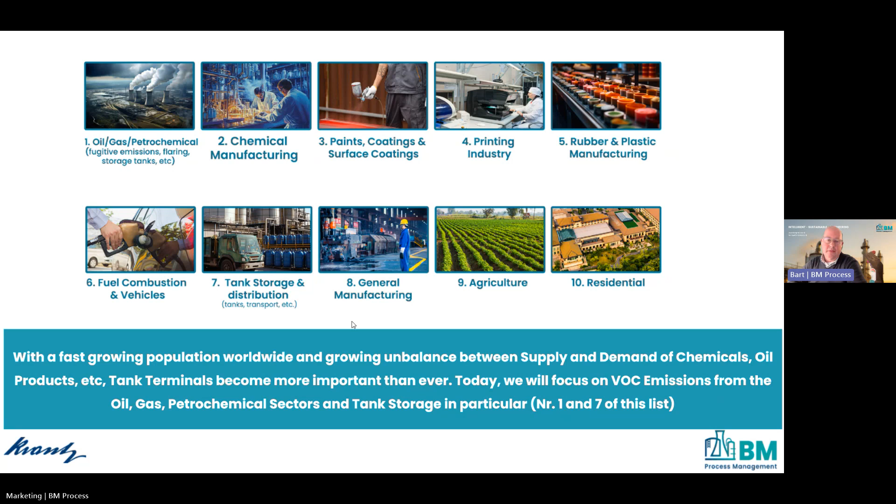Emission and the effects of laws that we use - I want to show this because you hear a lot in the world like, 'yeah, but it's only a small change, it won't help anything if we start to do this and that.' I happen to pretty much disagree on that, because we've got quite a few examples where it has been shown that it can actually work as long as we work together, which at present globally is a small challenge, but let's just try and see the good things here.

For example, number 2, the ones that still recall - the ozone layer used to be a problem, but we actually solved that. So that's one thing we did solve quite well. For example, HFCs in spray cans - you all know that had a real problem. Since we acted globally, that actual problem is gone. So that shows that it can work.

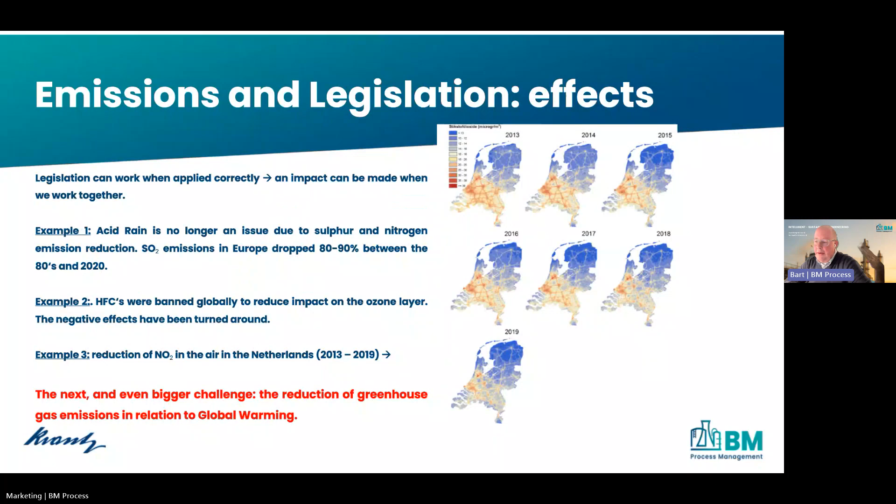Example 3 is the map that you see on the right. There you see NO2 in Holland over not a very long time frame, and you see how it has actually gone down. So we can act even in such a small spot as we are here in Holland - we're not that big, but still we can see it can work. The next, and I think the main challenge we will have, is the greenhouse gas and global heating up, and that's what we want to talk about a little bit more today.

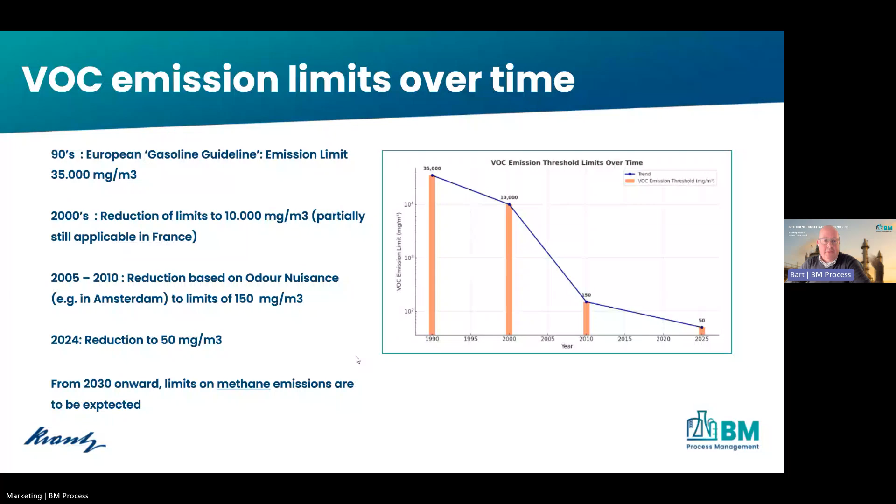Emission sources in tank storage, because that's what we are here to talk about. This does apply to quite a few other things as well, but for now we look exactly at this part. So there are actually 3 main sources.

One of them is, of course, the tanks, because you store the product, you have breathing and so on, so you lose product there. When you load and transport the product in ships, barges, trucks, rail cars, you have air that you have to treat, or there's air where there's actually product in it, which will have to be treated.

And then we have the final one, which is fugitive emissions. We will generally talk about the first 2, because fugitive, that is another ball game. However, on that, we have a little quiz in the next slide, so we can talk about how do you think you need to treat fugitive emissions.

So there are a few answers possible here. I would like to hear from you what you think is the way to treat fugitive emissions. Wait a second, see what you think.

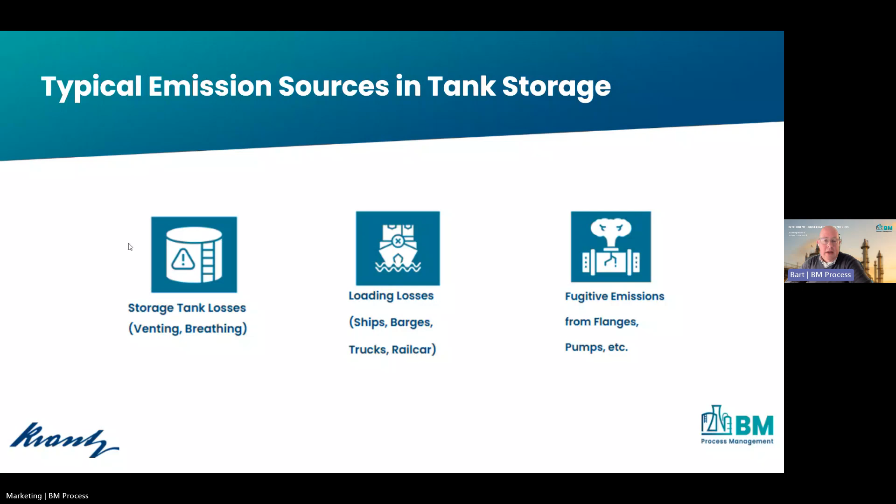We can go to the next slide, please. I should do that as well, because I have it in front of me.

So how to reduce emissions in tank storage? There's quite a few options we have. For example, floating roofs on tanks, or breather valves on tanks and so on, to ensure that we have less breathing losses. Then all the exhaust air streams, we can use treatment for them. That is option number 2. And option 3 is, as we just said, to ensure that you have a clear view on fugitive losses.

Let's say you have to make sure that you know where they are. That is the first challenge. And then to ensure that you can bring those down. There are quite a few options for that, as we previously discussed. So these 3 options are actually all in use as we speak, at a whole lot of the clients that we work for.

So what I want to note is that this has gone down dramatically over the past 25 years. So this works, it works like a charm. That is like we saw previously with the actual thresholds. We did a big leap and we really did a lot.

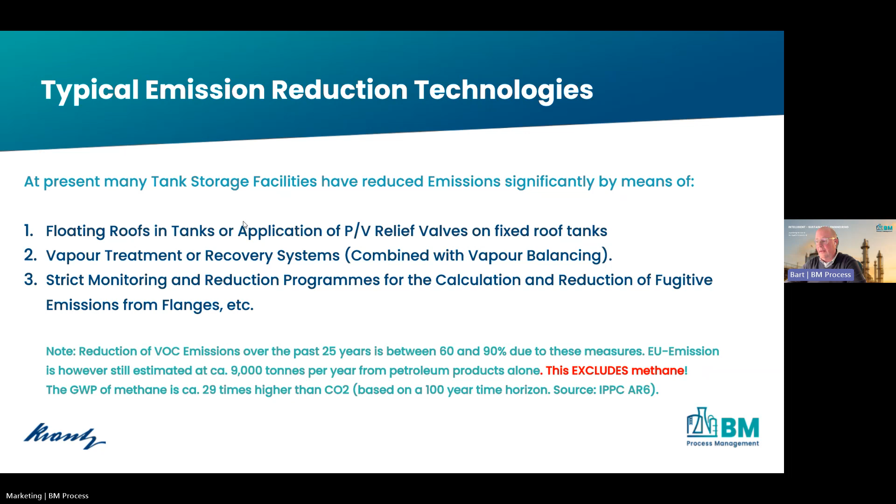However, only from the oil products alone, estimated, we still have a massive mass flow that we lose into the air, and therefore it has a massive effect on air quality and on global heating and this and that. And what I want to say once again, this excludes methane, and methane is quite a problem. But we will go into that in the next steps. So this is what I like to show here.

Then we can go into the next slide, please. The general processes that we use at tank terminals - there are many, I only want to talk about 2 because those are the 2 that we see most. First of all, we can burn the off gas. That can be in a flare, or you have quite a few processes there. Or you can actually treat the process in an actual VRU, which is also extremely widely spread.

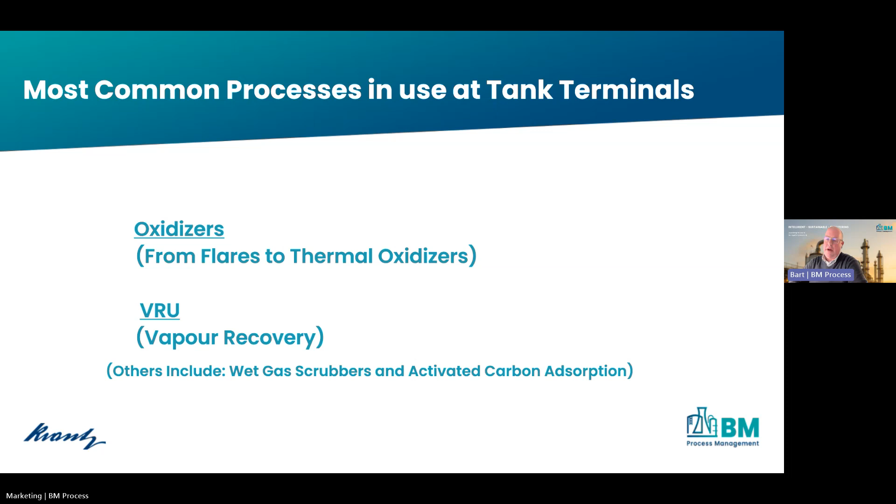Of course, you also have scrubbers and all kinds of other stuff. But those are not as widespread and generally a lot smaller. It's for very small streams and stuff like that. So these are the 2 main points, and I want to have those in mind as we go into the next slide.

I'll first talk about the first one, the oxidizer. So that means we just burn the off gas. We get the off gas from all of the actual processes we have on the site. We add a lot of extra gas, heat it up, burn it, and then you're done. You treat everything, it's clean.

However, you use a lot of gas, because there's a high airflow or a high gas flow that you have to heat up, and you have to crack all of the stuff that is in this gas stream. So you use a lot of gas, meaning since you have flames, you will also have NOx, and NOx is a problem, as we all know. And if you don't know, feel free to ask questions about that.

But the main problem here is we burn the off gas, we use a lot of gas, and we have extremely hot off gas. We blow it straight into the air. So we don't use any of this heat.

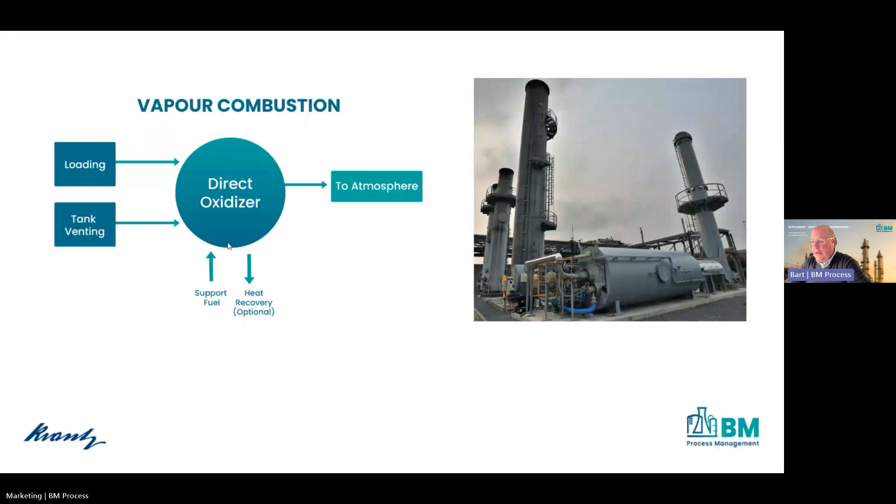The next process is the VRU, which we all know very well, generally known. And the pro of this is, of course, that we can make use of this product. We get the actual product out of the off-gas stream again that we can then reuse. Seems like a good idea. It is. Drawback is you can't use it for every product, but there are quite a few products where you can.

There's also another problem. These plants have a hard time meeting the latest thresholds that we have. I actually wanted to ask the question, do you think these plants can meet the latest threshold? But I just answered the question for you, so that's my bad. But anyway, we see a lot of problems with these plants.

So we can talk about that. It might be a question I ask in the chat now: what are the general problems you think clients have with plants like this? Where are they generally at fault, or where is their weak spot? I don't know whether there's anyone who cares to type.

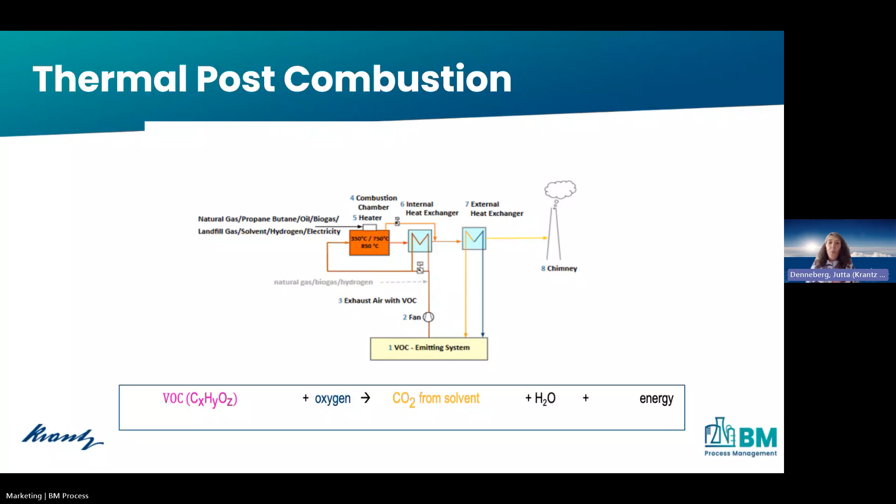So thermal post-combustion units therefore have an internal heat exchanger. They have heat recovery, which can be supplemented by external heat recovery. This distinguishes them from flares and simple oxidizers, so they are still allowed to be used. Regenerative thermal oxidizers are very energy efficient units. They have an internal regenerative heat storage system with a very high heat exchanger efficiency. These units are, so to speak, the best in their class.

So Amol, would you please let our audience guess how high the efficiency of the regenerative heat exchangers can be? Yeah, sure. I'm just launching another poll. So look at your chat or your screen, you will see it. The question is, up to what percentage of internal heat recovery can an RTO, regenerative thermal oxidizer, achieve? 55, 66, 97, or up to 100%.

Okay, I got 5 responses. 7, 8, 10. Let's have a few more. Our highest was 16, so let's have at least 16. 11. All right, let's wait for another 10 seconds and then I can submit and we can view the result. 12. Okay, I think we can view the result.

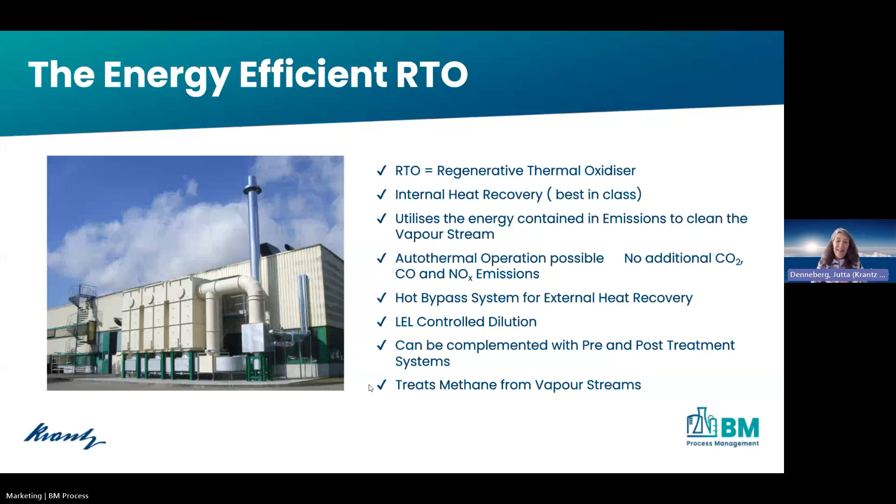The RTO itself has a complex control and regulation system. It can be completed, for example, with an LEL measurement for the controlled dilution of the exhaust air. Any dilution that may be necessary because the maximum authorized VOC concentration is 25% of the LEL can be part of a pre-treatment system. Depending on the composition of the exhaust air, pretreatment and post-treatment systems can be added to an RTO, for example, for inorganic compounds or droplets in the exhaust air. All types of VOCs can be oxidized in an RTO, including methane. Very important. So let's go to the next slide, please.

What emissions does the RTO generate? Well, that depends. If a fossil fuel, such as natural gas, is used for the burner to generate the necessary oxidation temperature, carbon monoxide and nitrogen oxides are produced in addition to CO₂ and water vapor. We saw the formula before. However, if the VOC concentration in the exhaust air is high enough and the heat from the VOC oxidation is sufficient, the burner can be switched off. This is also known as an autothermal concentration. In this case, no carbon monoxide and, more important in the Netherlands, no NOx is produced, as long as the exhaust air doesn't contain any nitrogen-containing VOCs.

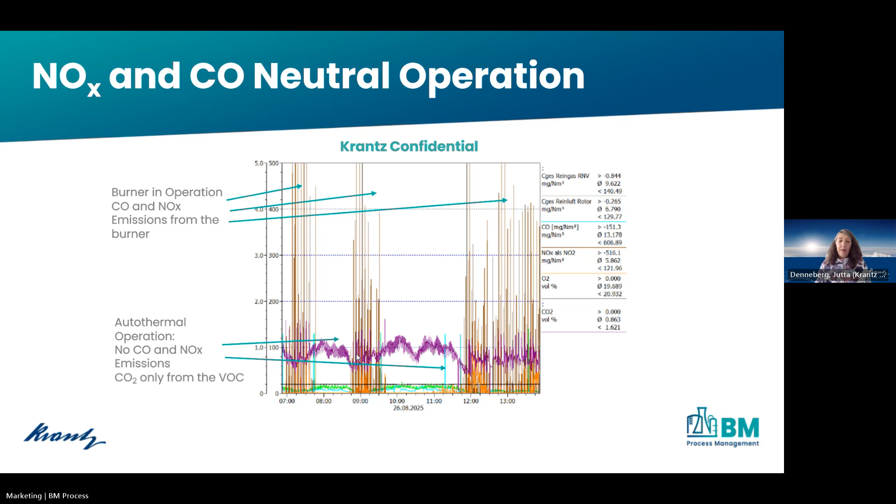This must be added. So I think this diagram you see now illustrates this very impressively. It shows two different patterns. One with additional emissions from the burner, this is with the brown peaks, and the other one without. So if we have an autothermal concentration, we still have CO₂ emissions. You see this is a purple curve, but you don't have additional brown peaks. This is a CO concentration, and you don't have any NOx. This is the orange one. So let's go further to the next slide, please.

RTOs can be used in all areas of VOC emissions. But what role do RTOs play in the limitation of the emissions coming from tank terminals, and what challenges do they face in this area? Well, all VOCs can be oxidized, but they behave very differently when this happens. So tank terminals often have to deal with a really wide range of products. And depending on the transfer and transport processes, the volume flow rates and the VOC concentrations vary greatly and change rapidly. There's a wide range of very different means of transport. Sometimes a ship is loaded and sometimes there's no ship in the harbor. And also the oxygen content and the humidity of this exhaust air can change a lot.

But basically, we have to deal with two main challenges. So cleaning a very highly concentrated exhaust air directly from transfer processes and cleaning the exhaust air after a VRU to ensure compliance with the strict limit values. Both exhaust air streams have their own unique challenges, particularly in terms of exhaust air pretreatment. So to delve deeper into these two tasks, I would like to ask Bart to join me. He knows so much more about tank storage than I do.

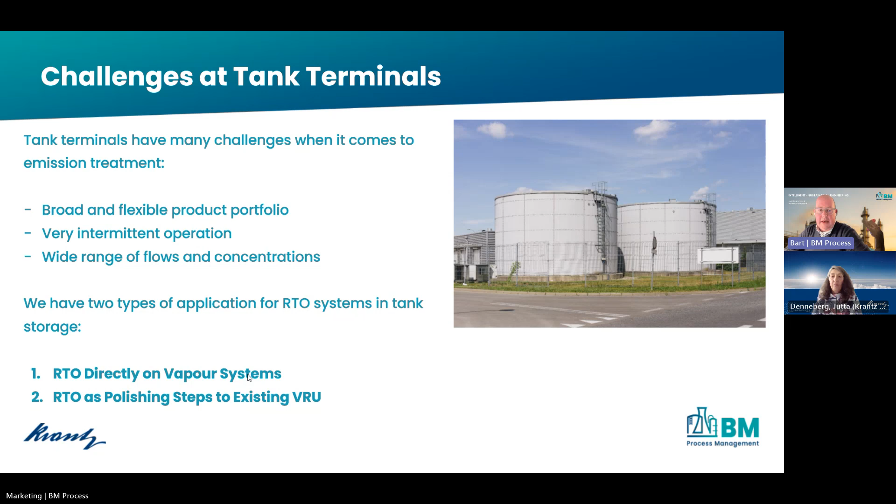We have two options, indeed, as you said. And that is actually new, but we will get to that. So one of the options is to use the RTO directly on the off-gas stream, even on a high load off-gas stream. You can just do that, it's not a problem. And of course, as an after treatment after an existing process, as you said. Both of them we have done, and we can go into those a little bit more in the next slide. So the RTO integration option number one, that is directly on an off-gas stream. And this is, I think, new-ish. I think it's new, to be honest, because of what we have done at a few clients, one of them is being built right now, and one of them will be built within the next half year.

What we see there is that we use a high load off-gas stream, and we actually act with an RTO, or actually in this case two RTOs, directly on the off-gas stream instead of the classical processes that they would have used a few years ago. And that's good news, because we feel that we can do this properly, but there's one big but, of course. The off-gas pre-treatment is critical in these things.

So how do I make sure that an RTO works properly on this off-gas stream? And how do I make sure that an RTO can work in this crazy world, which is what we have there with a big flow range, up, down, this, that, left, right? That is where we have worked on quite a long time. This can work. And even the RTO has a few pros on its side there, because even at very low flow rates, it can work very well.

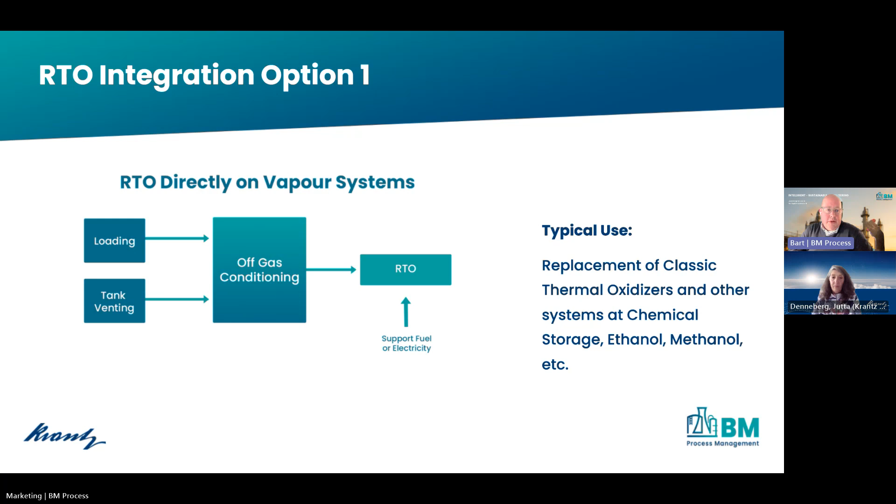So if it's not even for the air quality and all of this, it's also the price that you pay. So there's quite a few smart things here. So that's option number one. Option number two is as a post-treatment behind the VRU. So we can go to the next slide, Amol.

So what we see here is a classical process, I think, that we see more and more often. That is generally where you store and transport products that are actually cleaner products, let's say. You store them and all of the off-gas treatment is done, and you actually get product out of it that you can properly reuse. So a lot of clients have this plant on site since they first were built, and here in Holland we saw that on a larger scale since 2008.

Now, as said previously, these plants struggle with the norms that we have now. Plus, as said, methane is not treated in them. Not optimal. What can we do? Then we can place an RTO downstream. Works like a charm if properly designed.

I was involved in, I think, the first large-scale project like that when I still had a real job, let's say in 2016 for a client in Amsterdam, which is now a client that we work for. Back then it was my job. It has run for a long time now. It has worked very well. Of course, there are a few things that we learned over time, but that works very well. So you can use an RTO downstream, not a problem.

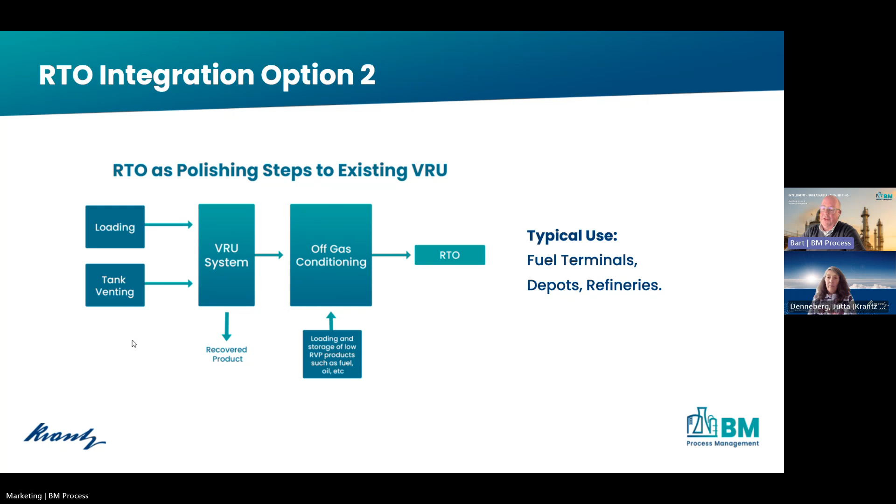Now, for the RTO, of course, we've got a few options, or at least Krantz has quite a few options. So perhaps you can talk us through those a little bit more, Jutta. Yes, so we have different types of RTOs. RTOs can be made specially tailored for the customer requirements. And as Bart said before, we are able to make measurements on the client side. So we can make first measurements and collect all the technical data we need to design an RTO which is perfectly tailor-made for these clients.

So we have all the steam the production plant uses via the hot bypass, via the oxidation of the VOCs the process emits. The concentration of the solvents in the exhaust gases is so high that we are able to produce all the energy the production plant needs. A very nice thing, and the client uses this plant to decarbonize his industry. For him, it's a very big step to go further with decarbonization.

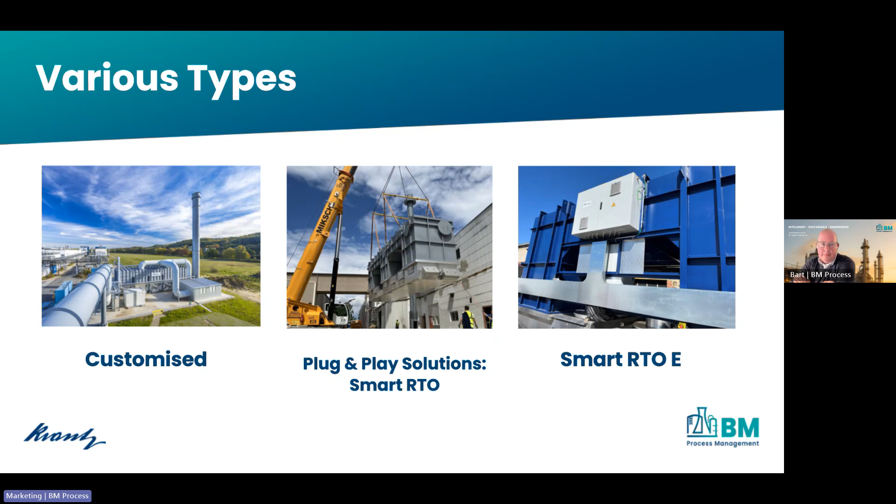Sorry, you see something else on my screen. Okay. And this ecosystem of partners helps us to ensure that our clients are not only compliant, but also future ready.